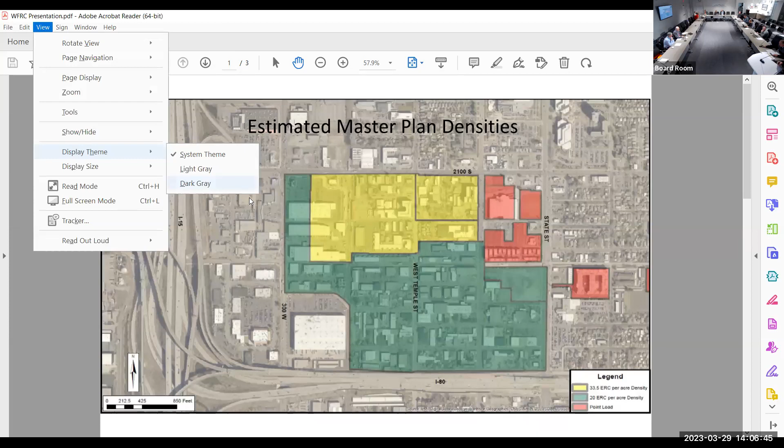Mike, is this on? Okay. Well, I'd like to say I was grateful for the opportunity, but you know, I'm here. Do make sure you get some of the refreshments. I called the mayor's office and said, what's a place that represents South Salt Lake that I should pick up some refreshments for this meeting? And she said, oh, you got to go to Delise Bakery. So that's her favorite spot. So anyway.

I've been with South Salt Lake for about 17 years, and I think the thing we've worked on the most in the last 10, 12, 13 years has been trying to create a downtown in South Salt Lake. When Mayor Wood was elected in 2010, one of the things she realized quickly was that South Salt Lake suffered from an identity crisis. People didn't know where it was, didn't know what it was. In fact, when I accepted the job at South Salt Lake, I told my mom, who grew up in Holladay, graduated from Olympus High School, that I was going to work for South Salt Lake. And she goes, oh, where's that? I was like, well, it's south of Salt Lake. She goes, oh, is it a new city? I said, no, it's incorporated in 1938, Mom. It's been around longer than you have.

So anyway, that was one of the things she tried to address. We came up with a new logo and tagline, the city on the move. And since then, we've been moving as quickly as we could. I just wanted to show you, this is kind of the area where our downtown will be. It's got 21st South on the north, I-80 on the south, State Street to I-15 east and west.

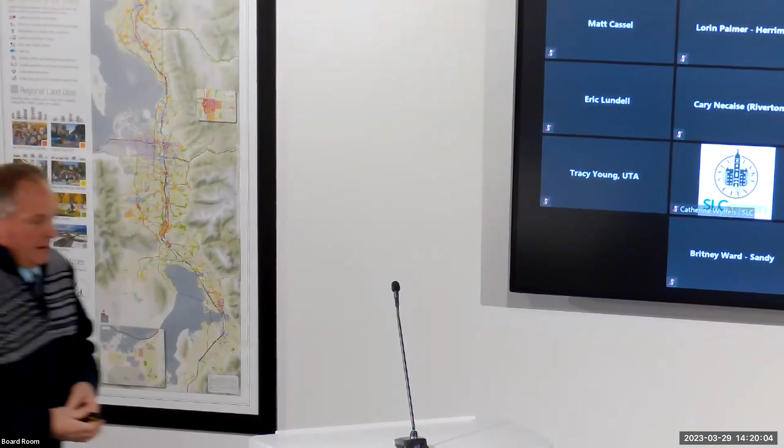Wonderful, thank you Madam Chair. So as Rosie's pulling up these slides, the intent of this meeting is we will have the opportunity to review the 4 programs that WFRC has responsibility and opportunity for as we coordinate and work with the local governments. But today, as we present this information to you, that's what we are doing - presenting it, and then this body will make those recommendations that we will take to TransCom. So reminding you of our process, many of you have seen this multiple times, but we're in the final stages of our project review and evaluation period.

And then after today's meeting, your recommendations, we will take to TransCom, which will meet at the end of April this year. Once TransCom reviews all the material and your recommendations, they will make recommendations to the Regional Council for the projects to be entered into the programs. Wasatch Front will then meet in May, and they will review that information and recommendations and make recommendations to put them into the draft TIP, which we will prepare with UDOT and UTA.

Take that information out to public review and comment during the month of July, and then be back to this body in August to report any comments or information that might have transpired or improved during the time. Then we go through approval during August through TransCom and Regional Council, and it goes to Federal Highways and Federal Transit during the month of September. And then come October 1, we have our new 2024-2029 Transportation Improvement Program. Prior to that approval, we'll be starting on the next one.

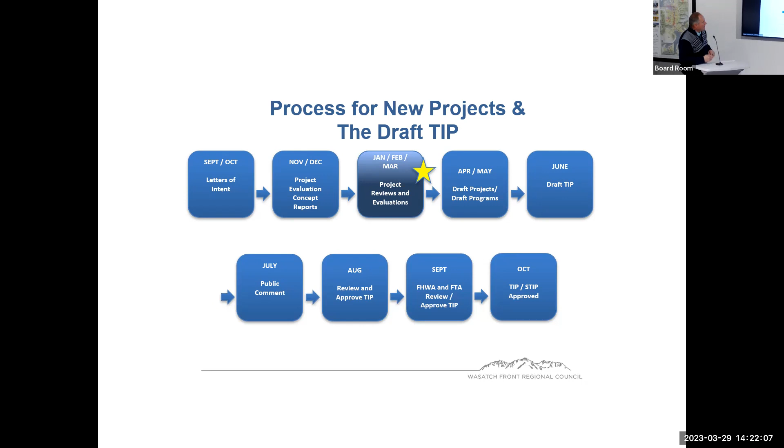As you're aware, in the Salt Lake area, this is where all the projects are. We had 71 projects that we had the opportunity to evaluate, review on site, and work with project sponsors. We had the STP, there was more than $147 million in request, and we have an available 27 million to program. In the CMAQ, there was almost 57 million in request, and we have 11 million to program. TAP was a little more than 21 million with 3.4 million available to program, and the carbon reduction program, brand new, this is our first year with it, we had 42+ million in request and 4.5 available to program. So that's what we're gonna go.

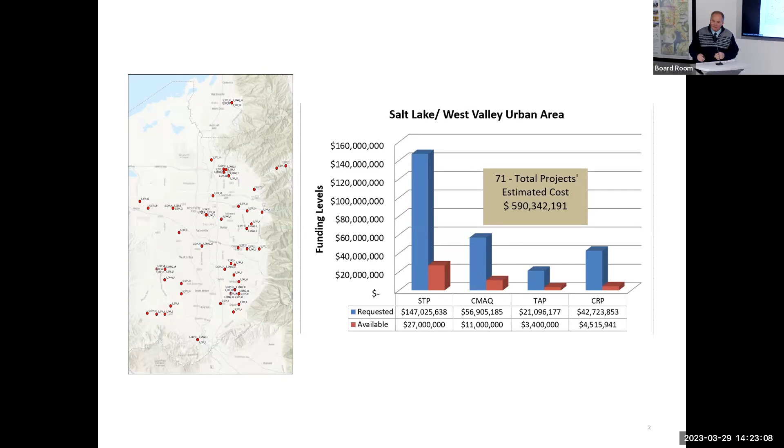The intent here is to fly through first the STP program. We'll walk through these 31 projects very quickly so that you're familiar again with the project, so it's more than just a name on the page. Then we will pass out these tables and have that discussion, starting with the staff recommendations. Then we'll turn it over to the chair to walk through any discussion on the projects and then for approval of the program. Then we'll come back and go through the CMAQ and the carbon reduction program slides, go through that discussion, and end up with the TAP. So any questions on where we're gonna go from here? We're gonna go kind of quick.

Fantastic, so here we are. I won't go through as much detail as we did in February, but we'll go through each slide. So on the 31 slides, the very first project that we'll review is the Cottonwood Heights.

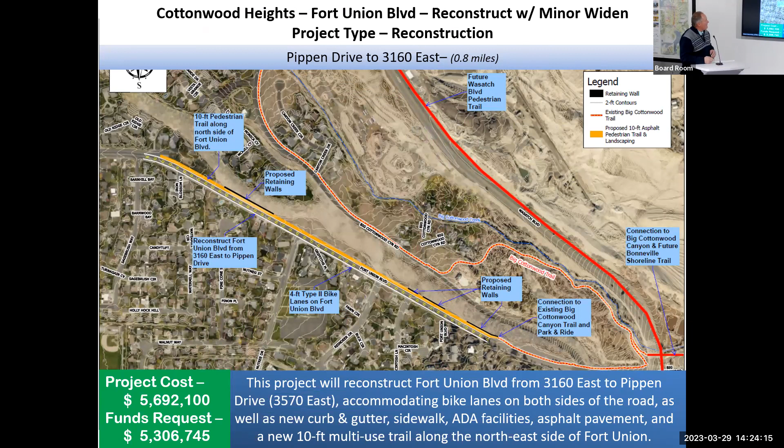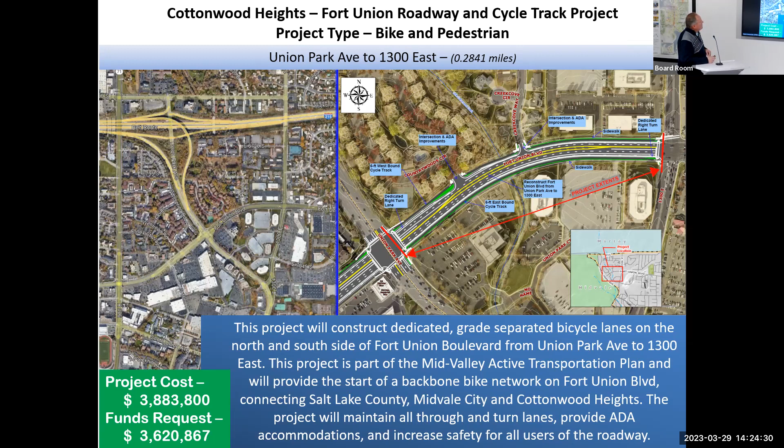It's Fort Union Boulevard, reconstruct with minor widening between Pippen Drive and 3160 East, just under a mile in length. The next project is another request from Cottonwood Heights, the Fort Union Roadway Cycle Track Project, down closer west between Union Park Avenue and 13th East, just over a quarter mile in length.

The next project is a request from UDOT. This is in the Draper area on 123rd South at Lone Peak Parkway. This is to address turning movements coming off I-15.

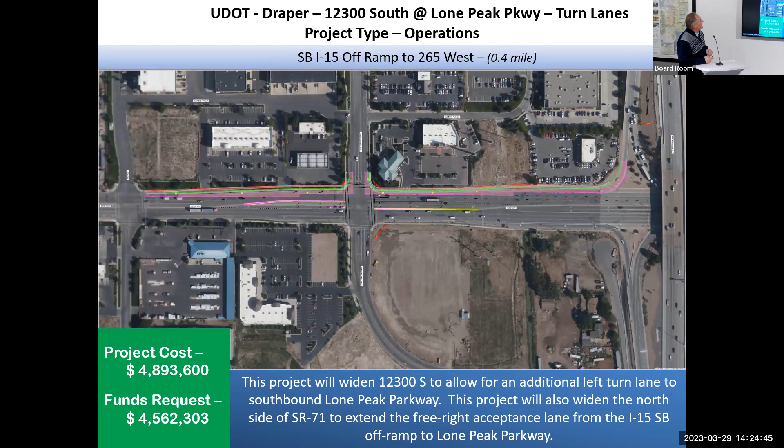The next project is a project request from Draper, on Fort Street. This is a reconstruct and minor widening to get a uniform cross section between 132nd South and 138th South, 8/10 of a mile in length.

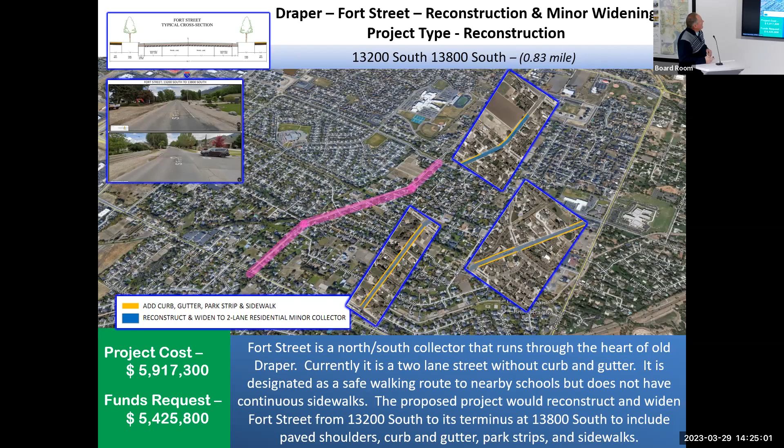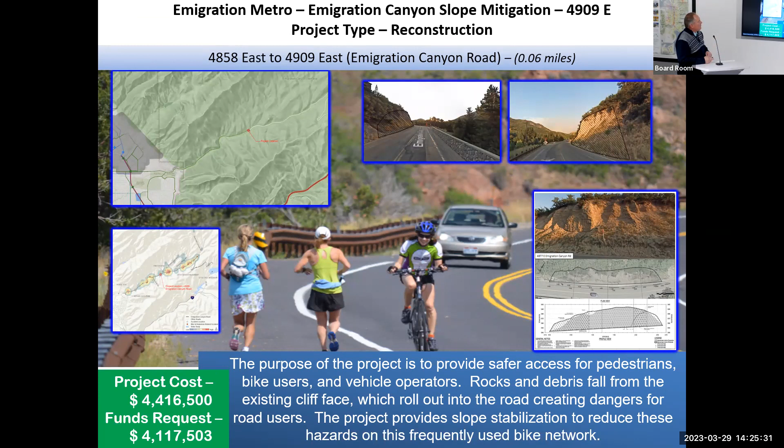Next project request is in Emigration Canyon, for canyon slope mitigation at about 4900 East. We've seen this project before - they have rock fall that drops down onto the road, making it hazardous for the motorist as well as the bicycle and pedestrian use up the canyon.

Next project, also in Emigration Canyon, is for safety improvements between 5655 and 9698, moving up the canyon, for various safety improvements: widening the road, moving back the barricades, and improving it to minimize bike and pedestrian interactions.

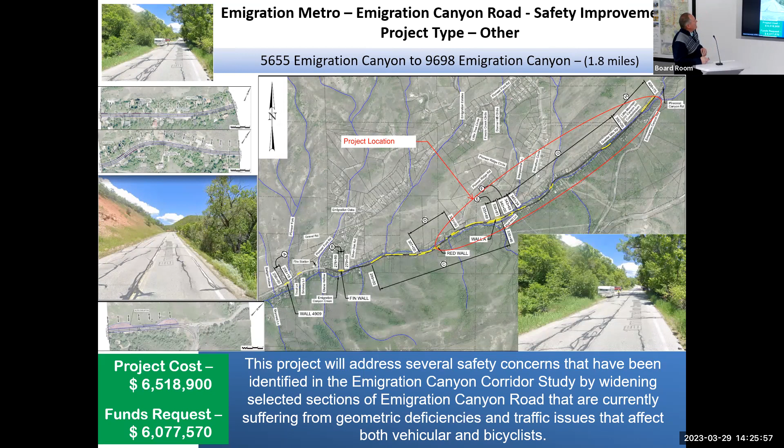Next project request is in Herriman City, on 12600 South, Herriman Main Street. This is for a center intersection improvement there at 12600 South and Main, giving you additional right turning movement.

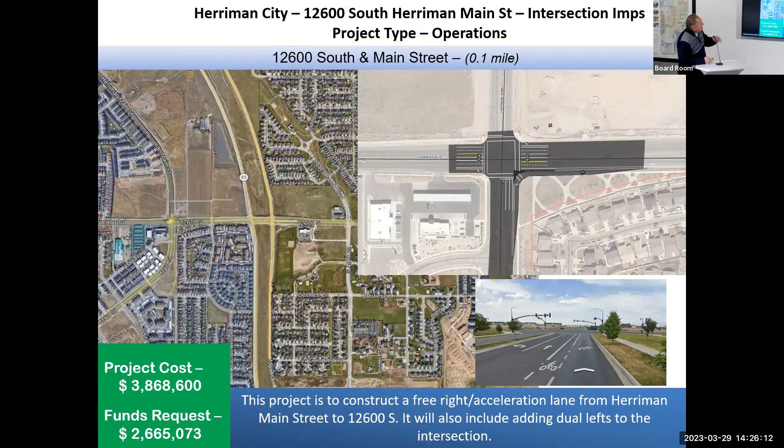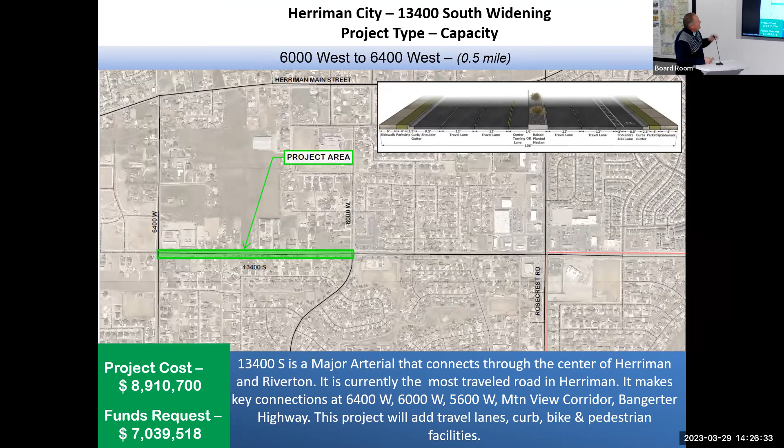The next project is in Herriman City, on 13400 South. This is to widen the facility from the existing 3-lane to a 5-lane cross section. Further east, it'll be a 7-lane cross section; further west, it'll be a 3-lane cross section. But this particular ask is between 6,000 West and 6,400 West.

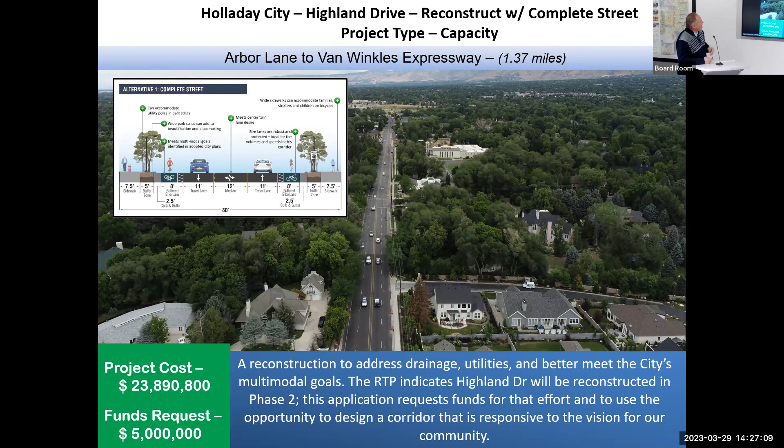The next project in Holladay is for a reconstruct and a complete street on Highland Drive between Arbor Lane and Van Winkle, a little less than 1.5 miles in length, to get a complete street use of the facility.

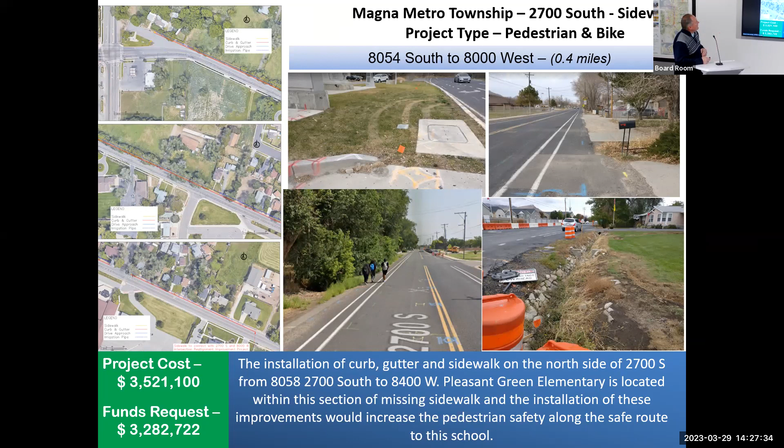Next project is in Magna, from the Metro Township, on 2700 South. This is a safe routes type of improvement on this facility. It'll widen the road, give you curb, gutter and sidewalk on the north side of the facility, and give a uniform cross section of the road between 8000 South and 8000 West.

Next project, Millcreek, this is on 13th East.

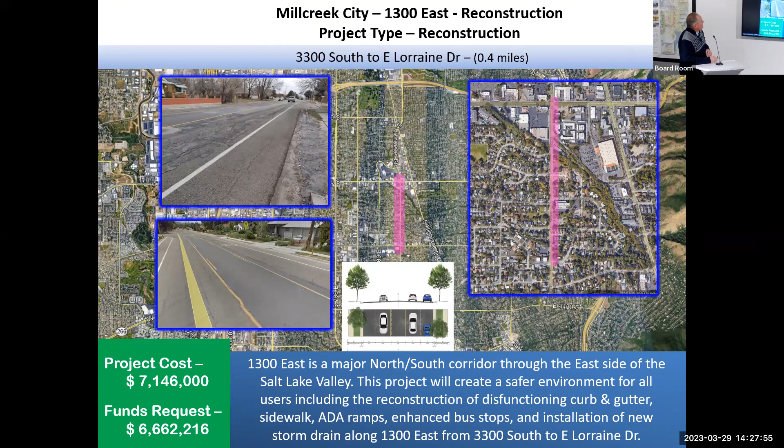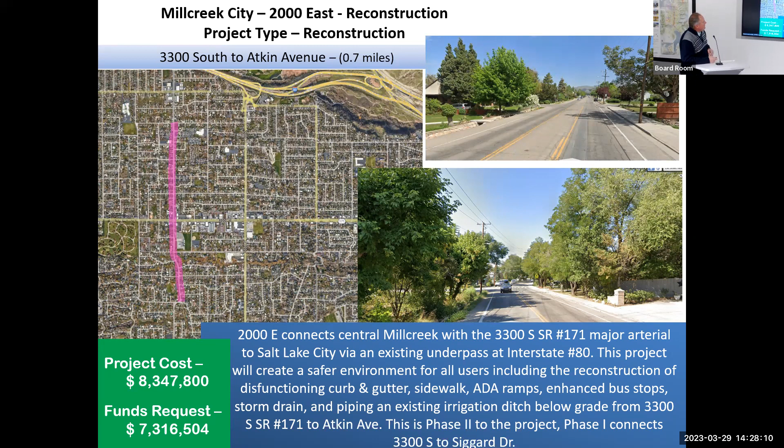This is a reconstruction of this particular facility between 33rd South and Lorraine Drive, just under a half mile in length. Next project also in Millcreek, on 20th East, a reconstruct with curb, gutter and sidewalk between 33rd South and Atkin Avenue, about 3/4 mile.

Next request is the UTA Mid-Valley Connector, for electric buses on the Mid-Valley line. That line runs from the Murray, Utah Murray Station over to West Valley, to the Central Station, about 7 miles in length of this BRT.

Next project is a request from Salt Lake City, 9th West reconstruction project between North Temple and 600 North, 3/4 mile in length. Next project is a request from UDOT Salt Lake City, on Foothill Boulevard or SR 186, for ped and bike improvements along this facility between 17th South and Laurelhurst Drive.

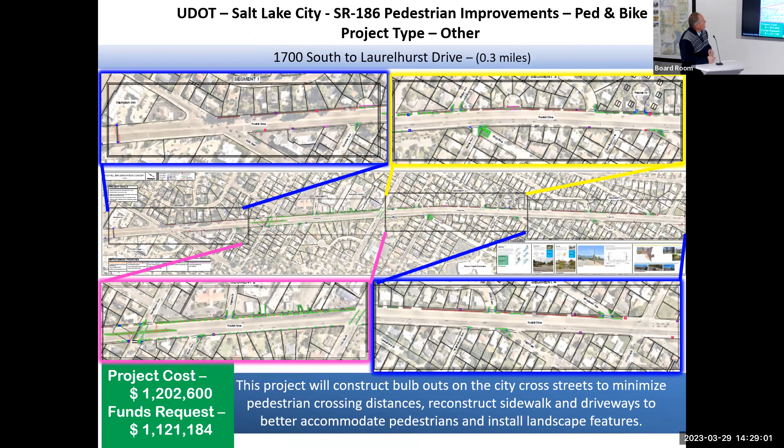Next request is from UTA, the Salt Lake On Route electric bus charging infrastructure. This request is for 2 electric chargers so the buses have more distribution on their use.

Next project is a request from Sandy City, on 110th South and 10th East, to construct a roundabout at an existing intersection.

Next project is also in Sandy, on 114th South and 13th East, for operational improvements to address turning movements. Next project is at Draper-Sandy City, on 114th South at 7th East, also to address turning movements, dual lefts both eastbound and northbound, and right turn improvements.

The next request is the Davis Salt Lake Connector, for construction of this facility between Davis County and Salt Lake City.

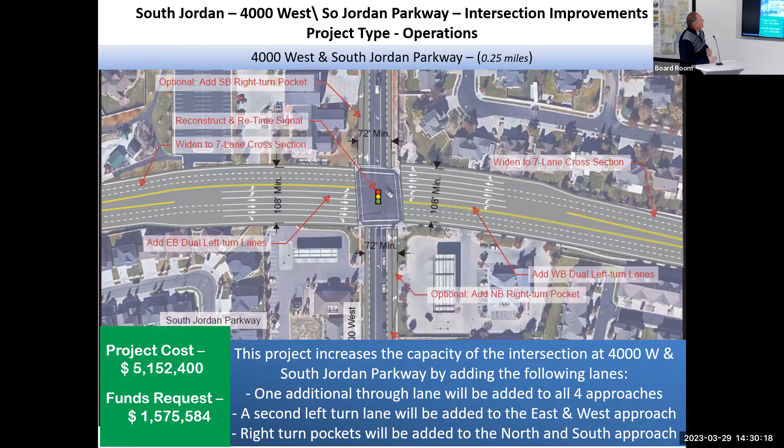Next project in South Jordan is on 4000 West at South Jordan Parkway, for intersection improvements to put an additional through movement on all four legs. Next project is also a South Jordan request at 4000 West, to create a through U-turn intersection improvement.

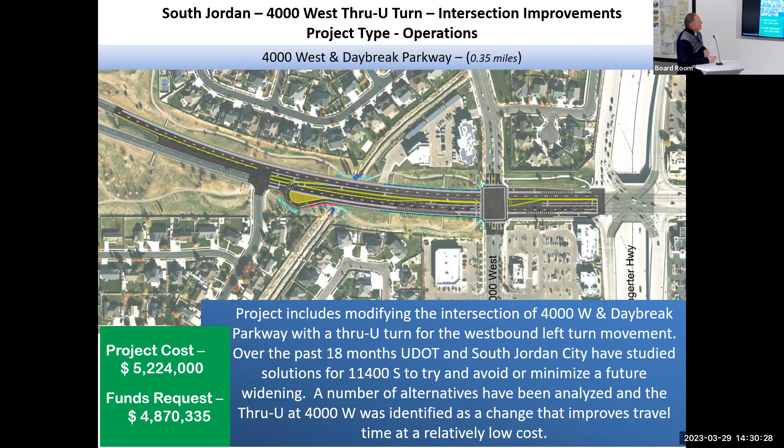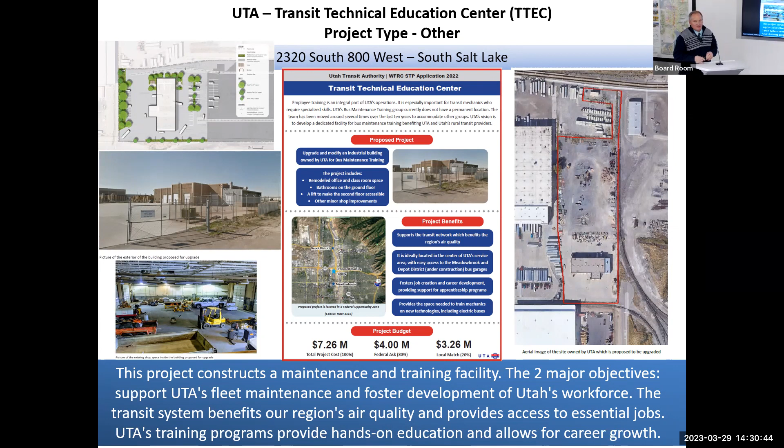The next project is UTA, for the Transit Technical Education Center. This is to take an existing facility and make it into an educational system for mechanics, drivers, and other UTA personnel. Then we have a request from West Jordan on 90th South, for new construction at the intersection of 64 West and New Bingham Highway.

We have a request from Redwood, or West Jordan, on Redwood Road at 6720 South. This is also an intersection improvement, to install a signal at this intersection.

The next one is a request from UTA, for the West Side Express bus service. This will go from the intermodal center at Salt Lake all the way to the old Bingham Highway Station, 29 miles.

Sorry about that. Let's see, did we do this? I hit a...

Then we have a request from West Valley City on 13th West. This is to improve this facility to enhance the bike lanes, as well as to control the width of the facility between 40th South and 33rd South.

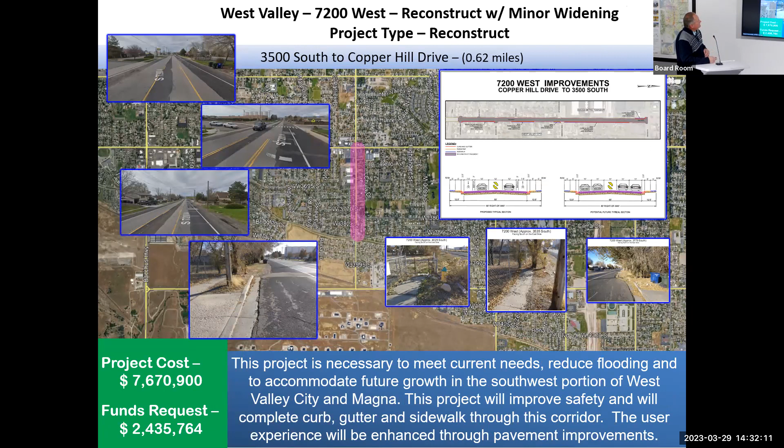Next project from West Valley is on 7200 West. This is reconstruct with minor widening, improvements to curb, gutters, shoulders, and sidewalks between 3500 South and Copper Hill Drive.

Then we have a request from West Valley City and Taylorsville City on 3900 South. This is mainly for bike and ped improvements, but will also address reconstruction of the existing facility.

And this particular project from Salt Lake City, the East Downtown Mobility Hub with electric bus charging stations, has been withdrawn from the program. That's all of the STP projects.

Was that quick enough? Want to see them in reverse? We can accommodate. So, thanks.

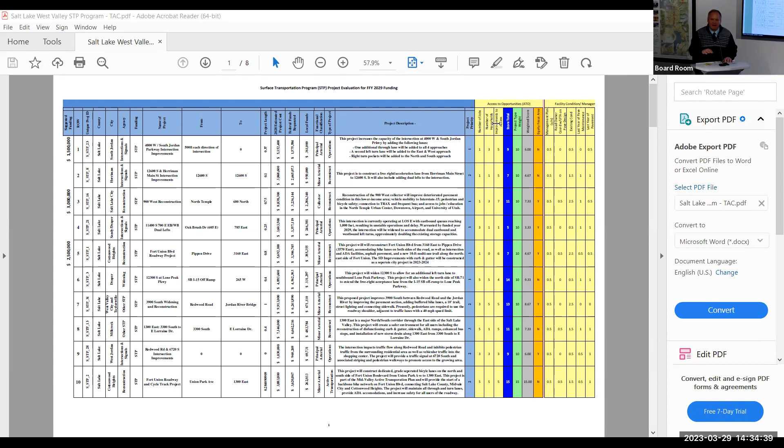One thing we've done differently this year than in the past is we put the amount of staff recommendation right on the sheet as we initiate our discussion and conversation with you. We'll walk through each of those, but as you look at the project and the points, this is one tool to identify and select the best project for the funds we have available.

There are other things we utilize to help identify the best project. Not only do we use the data, but this information is extracted from the concept reports that we receive from you.

We take that data, enter it all into a database, compile and calculate and determine what this information is and we put a point to it. But other things we're looking at and considering are items identified out on the field review. When we're out there with folks from our office, all of you were invited to participate via Zoom. We had participation this year also from the county, UDOT, UTA, and staff. We go out on the project site, identify projects, highlight their benefits, and underline some concerns. We also have other relevant professional considerations that help us identify a project that you can't really put a score to.

So those are items we utilize to identify a good project. As we're going through, we don't just take the top 10 projects identified by points, but we'll go through each project and have the reasoning behind why that project is being recommended from the staff. So if there are no questions, we can start. And everyone online has got a copy.

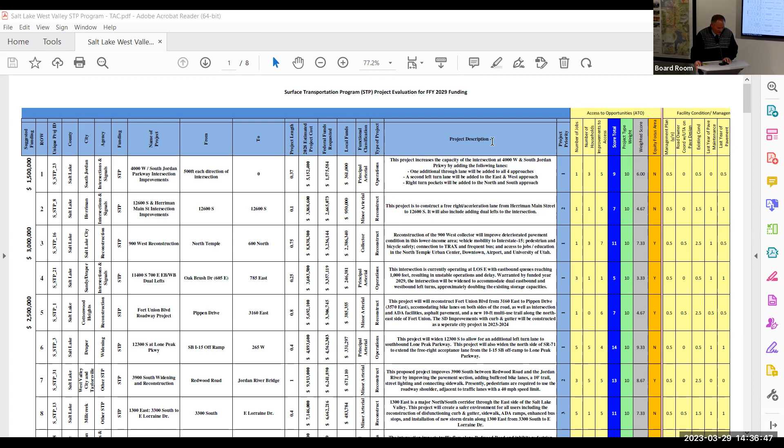Thank you, Ben. So the very first project on the sheet, row number 1, you have $1.5 million there in the far left corner. This is a project in South Jordan, on the intersection of 4000 West and South Jordan Parkway. Their initial request was for 1.57 million and staff's recommending 1.5 million. This is one of the projects that was partially funded last year.

Then going down, we skip the next project in Herriman on 12600 South - we'll address a higher priority one. As you can see, let me walk through the top of the sheet. In the column, you'll see a blue column about two-thirds of the way across on the right-hand side - that column has the priority, the city's priority on the projects. As you know, when you prepare the concept reports, we ask how many are being submitted by the city and what's the priority. It helps us - it doesn't guarantee that's always going to be our first recommendation, but it gives us an idea of what's important or where the city's focusing.

So row number 3 is a project on 900 West. This is a Salt Lake City project. Their request was for $3.2 million, staff's recommending $3 million. This was also a request from last year.

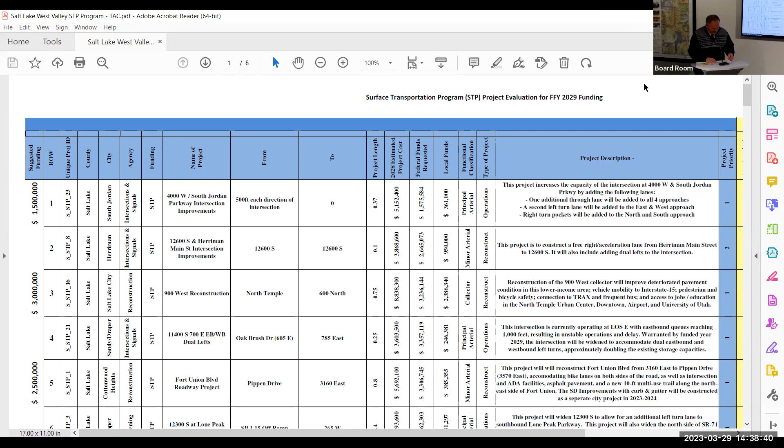Then we skip row number 4 and move on to row number 5. This is a request from Cottonwood Heights on Fort Union Boulevard between Pippen Drive and 3160 East. The request was for 3.3+ million and staff is recommending 2.5 million. We skip rows 6, 7, 8, 9, and 10, which moves us on to the next page.

The first project on the next page is project number 11. This is a project in West Valley Magna, on 7200 West - a reconstruction project. Their request was for $2.4+ million and staff's recommending $2.4 million. This was another project that was recommended last year.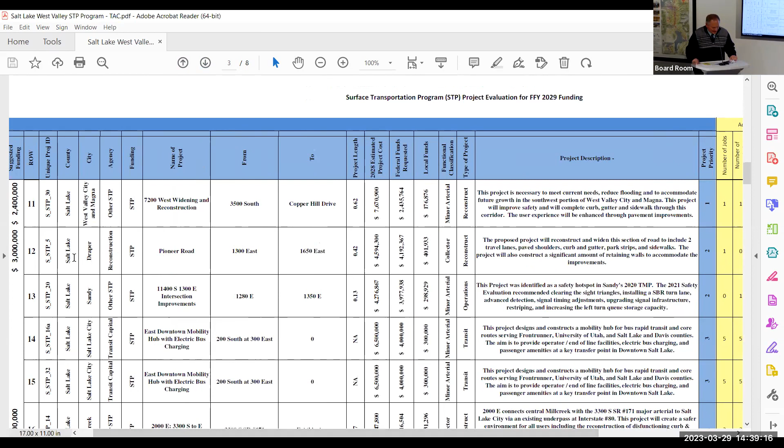The next project, row number 12, is a project in Draper on Pioneer Road, from 13th East to 1650 East. The request was for $4.1+ million and staff is recommending $3 million for this project.

We then skip rows 13, 14, and 15, which brings us to row number 16. This is a Millcreek project on 20th East between 33rd South and East Atkin Avenue. They were requesting 7.3+ million and staff's recommending $3 million.

The next project is a request from West Jordan City, on the intersection at 90th South between 6400 West and New Bingham Highway. The request was just under $5 million and staff's recommending $2.5 million.

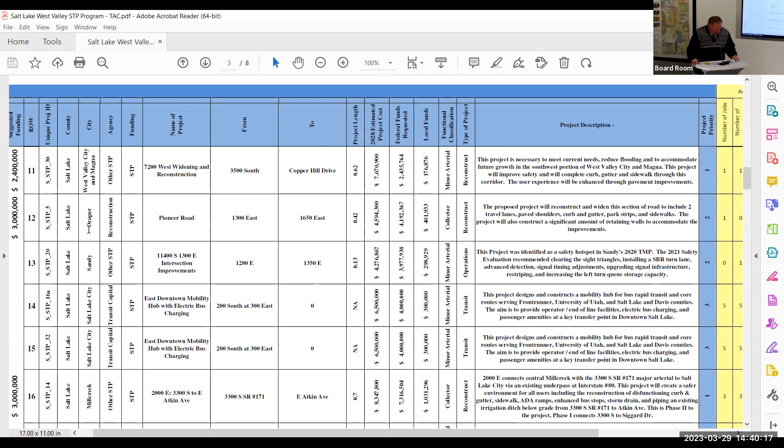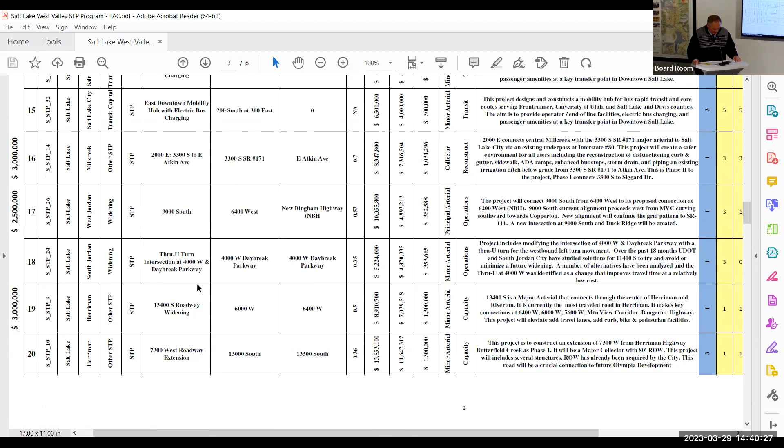Then we skip row number 18 and go to row number 19, which brings us to Herriman's 13400 South. This is for roadway widening between 6,000 and 6,400 West. The request was for a little more than 7 million and staff is recommending $3 million. We skip row 20, which brings us to the third page.

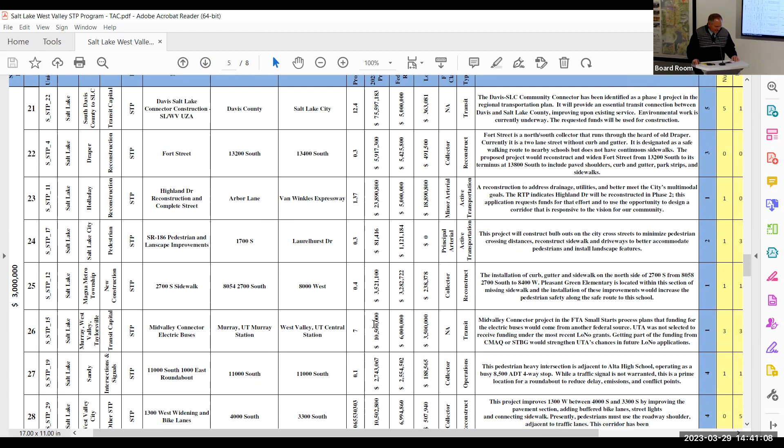We go down to row number 25. This is a request from Magna Metro Township for the sidewalk on 2700 South between 8054 and 8000 West. The request was for 3.2 plus million.

Staff is recommending 3 million. We then skip down to project number 30, an Emigration Canyon roadway safety project between 5655 East and 9698 East. The request was for a little more than 6 million, and staff is recommending 3 million.

I believe that is the last project being recommended by staff. That gives us the total at the bottom of the fourth page - a total programmed amount of 26.9 million. The available was 27 million, and the requested was 148 million.

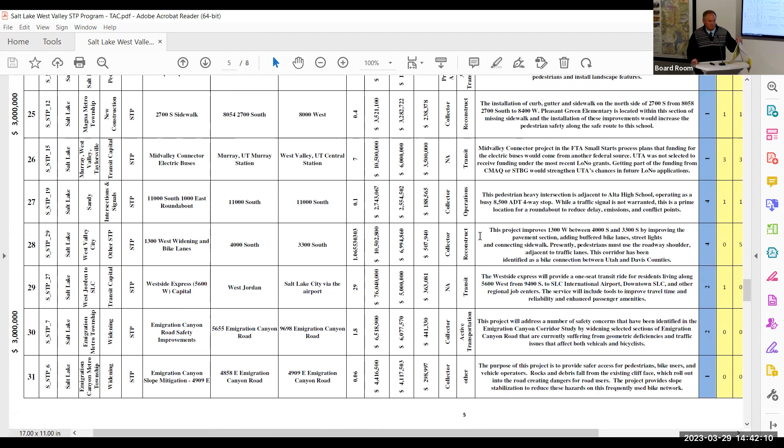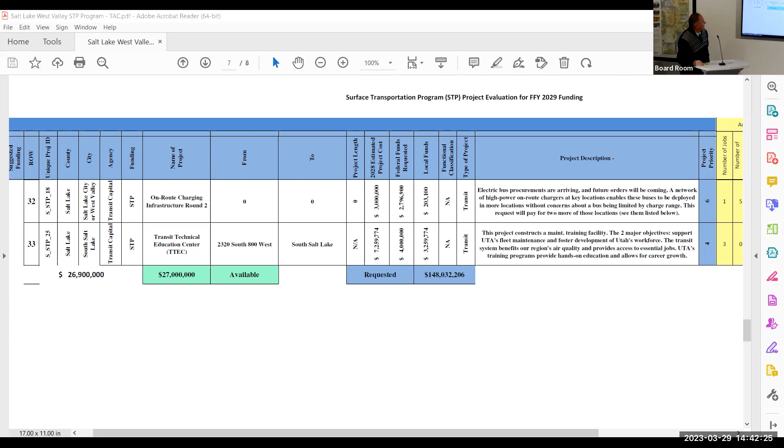Any questions on any of these projects or any of the staff recommendations? Okay, Madam Chair, for discussion and approval. No questions. Is there anyone that needs to bring up any discussion items on the recommended project selections for funding? Okay, I am not seeing anyone.

At this point, we'll make a motion to recommend these selected projects and funding amounts to the Transportation Commission. Is there anyone in this group who would be willing to make that motion?

Before a motion, might I ask if others in the group - I personally here in the Salt Lake area would like to see the CMAQ projects and recommendations before we make an STP recommendation. I know a lot of entities applied for both CMAQ and STP. At least I know UTA did. It seemed like there were a lot of other intersection projects that were on both as well.

Do we want to see what the rest of the TAC thinks, if they want to see that first or not? Okay, sure. Is that something that we can do, Ben?

The CMAQ and the CRP program are pretty closely tied, so it's almost that we'll need to go through all of the full programs before we take any action. That's totally up to this committee.

Or maybe just skip the STP recommendations to last and do the CMAQ, CRP, TAP, and then see what's left, because there's a number of projects either in the CMAQ and the STP, or the STP and the TAP, but if they're recommended in that, then they'll fall out of the STP, and maybe it's a different discussion.

All right, so this is the CMAQ program. There were 15 projects submitted in the CMAQ. Of the 15 projects, they totaled a little under 60 million. We had 11 million to program. A couple of those projects withdrew, but we'll go through that. There's all the projects that you had information for.

The first one, request is in Herriman. This is a park and ride facility out on Porter Rockwell Boulevard and Rockwell Park Drive, right off of east of Redwood Road. The next project is a project in Holladay - this is the complete streets improvement.

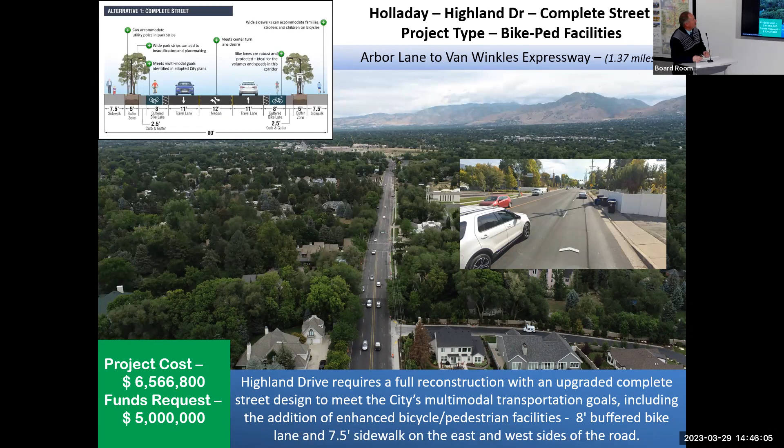This is for the bike ped facilities portion of that project between Arbor Lane and Van Winkles Expressway. Next project is the signal optimization project in Holladay, for multiple intersections through Holladay City.

Next project is the electric buses for the Mid-Valley Connector with UTA. The next project is the East Downtown Mobility Hub with electric bus charging. This is one project that's been withdrawn for this year's evaluations.

Next project is Salt Lake City's expansion of the bike share program. Next project is the intersection improvements in Salt Lake on 500 East and 700 South. This is to convert an existing intersection to a roundabout.

Next project is the en-route electric bus charging infrastructure for UTA - this is for 2 chargers. The next one is the West Side Express operating costs. The request is for 3 years of operations, 3 million dollars a year.

The next one has no comments there - who was that? Unless that was you, Merritt, then that's totally fine. But the next project is in Sandy, on 11000 South and 1000 East. This is to construct a roundabout at an existing intersection there by Alta High.

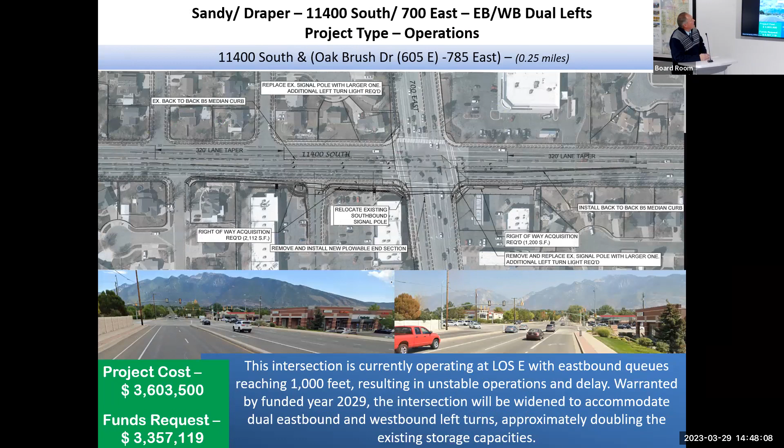The next project is in Sandy, on 114th South and 13th East, intersection improvements. Next project is Sandy City's on 90th South, or SR 209, for a pedestrian bridge over 90th South. The next project is a joint request from Sandy and Draper on 114th South and 7th East for intersection improvements.

Next one is the Davis Salt Lake Connector, for construction of that bus facility. Next project is UTA West Side Express, for the construction.

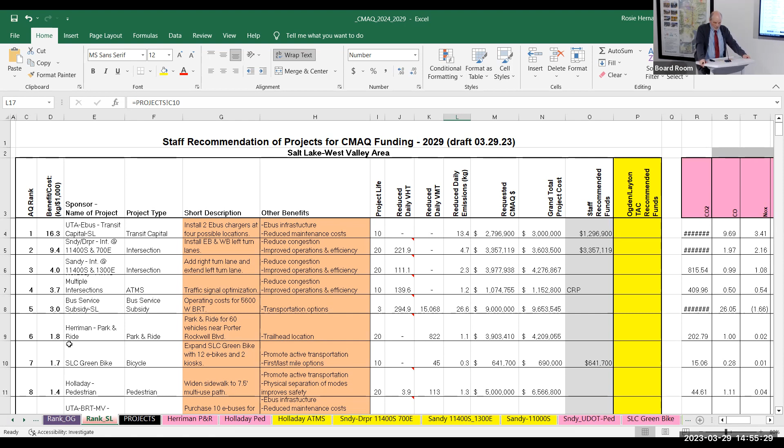The Holladay pedestrian project, they had multiple proposals as well, and we were recommending their signal timing project in the CRP program.

Where am I? The UTA Mid-Valley BRT. This is for purchasing 10 e-buses. We recommended partial funding there. I think that's enough for 2 e-buses.

And then the last one we were able to get to was the Sandy pedestrian project, a bridge spanning SR 209. That's 90th South, right? So that brings the total of those CMAQ recommendations to just over 11 million.

Ben says he's good for the other 17,000. He sold a few llamas this year, so he's in good shape.

One other note: in those two columns in the center, highlighted in beige, we identify some other ancillary benefits to these projects. It's not totally emission reductions we're looking at. We do consider that there's safety benefits or other considerations that play into those recommendations. So any questions about what was presented here?

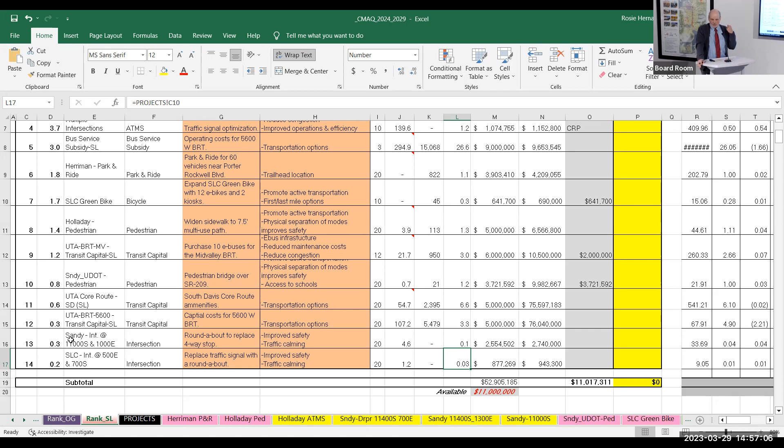Okay, then I think we were going to look at, Ben's going to show slides of the carbon reduction program proposals, and then they'll come back with the recommendation on carbon reduction, which you have before you already. So my further comments will be brief, I think.

Do I? I would, it would detract from the meeting, I'm sure. No good at those either. But anyone else is welcome to add if you have one. Ah, saved by the bell. Here we go. All right.

So we're going to review the carbon reduction program. There were 15 projects submitted for evaluation, totaling almost $43 million. Pretty good for the first time we've had this chance with this particular funding source. 4.5 million available. So on those projects, the first project would be a request from Cottonwood Heights.

It's a Highland Drive protected trail bike-ped facility. This is on the east side of the road between Fort Union Boulevard and Vine Avenue. I know I said that wrong.

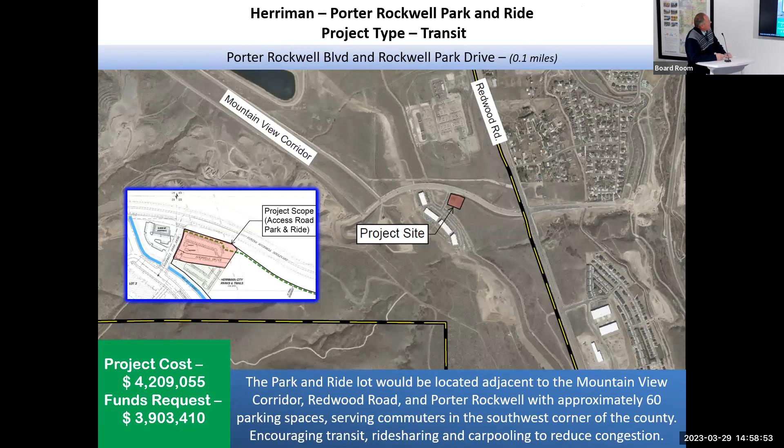Sorry, Matt. The next project in Herriman is the Park and Ride facility just west of Redwood Road, on Porter Rockwell Boulevard and Rockwell Park Drive. Next project is the signal optimization project in Holladay at multiple intersections through the city.

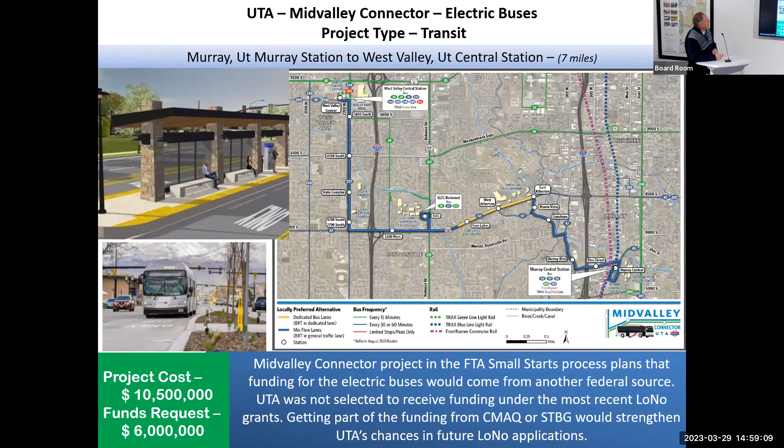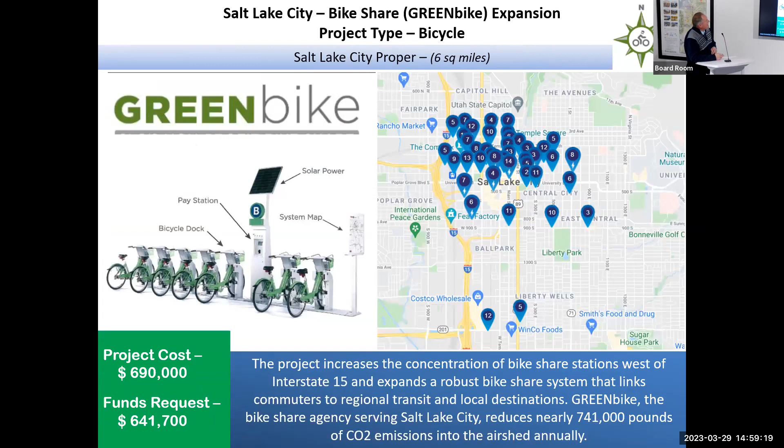Next project is the Mid-Valley Connector electric buses. Then we have this project that was withdrawn, the East Downtown Mobility Hub. We have the request from Salt Lake City on the GREENbike expansion.

We have the request for an electric vehicle car sharing program in Salt Lake City. This would be for two locations. We have a request for an intersection improvement at 500 East and 700 South in Salt Lake City, converting a regular intersection into a roundabout.

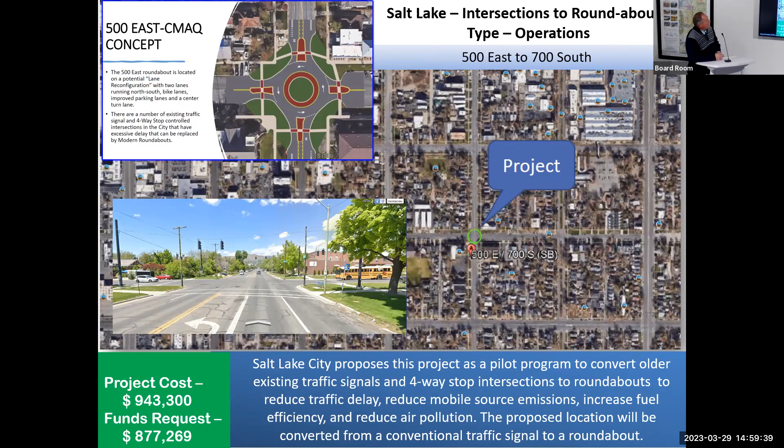We have the en-route electric bus charging infrastructure for UTA, for two chargers. We have an intersection project at Sandy City, just outside of Alta High School, to convert the intersection into a roundabout.

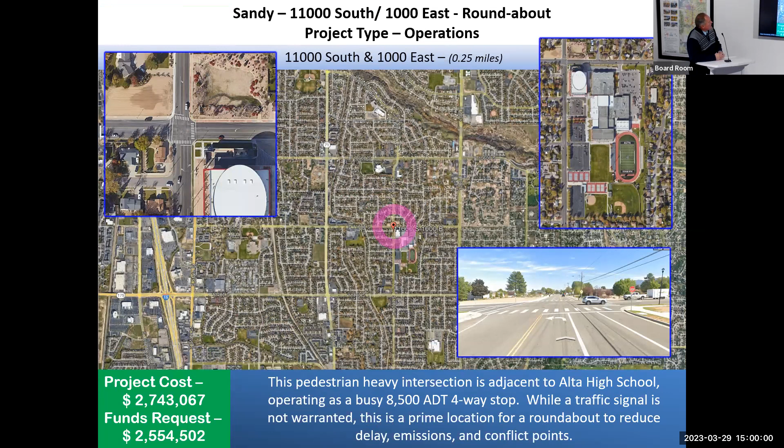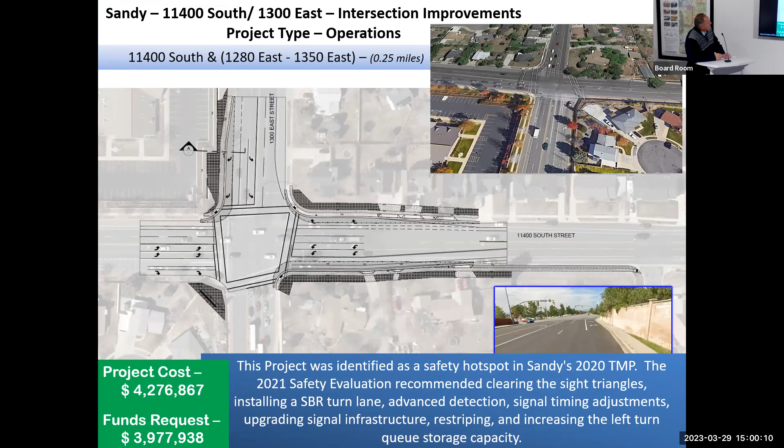We have a request from Sandy City on the intersection at 11400 South and 1300 East to address the turning movements. We have a request from Sandy City for a bike-ped overpass or bridge over SR 209.

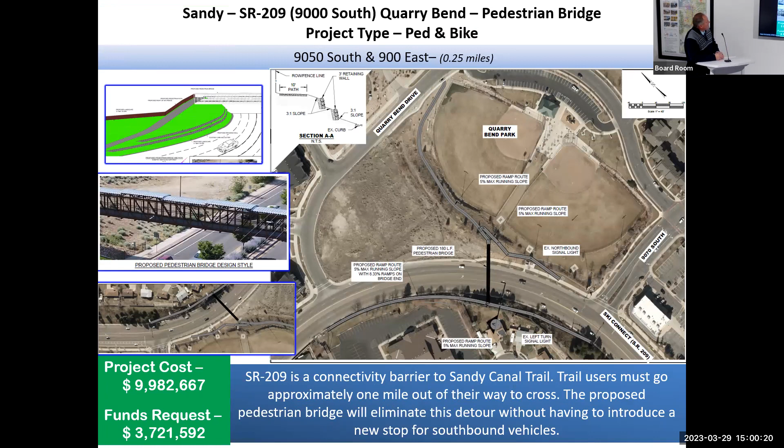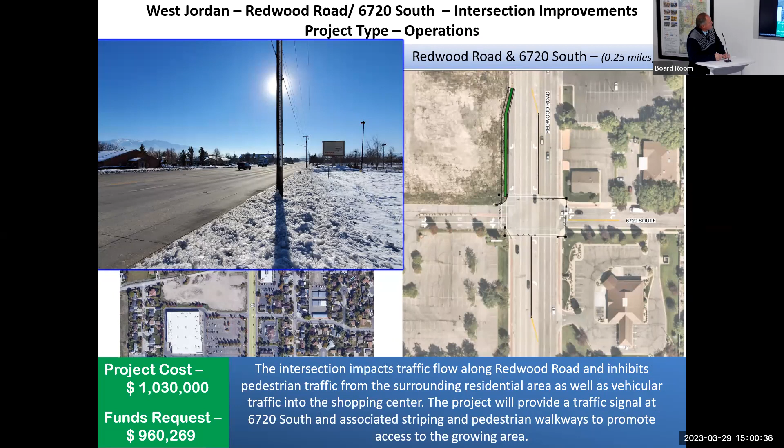We have the Davis-Salt Lake Connector construction project. We have a request for an intersection improvement in West Jordan at Redwood Road and 6720 South, to put in a signal. We have a request for the construction on the West Side Express.

And that's all of the CRP. Kip.

Thanks, Ben. One point I wanted to make about the CMAQ program discussed earlier: we had a lot more money this cycle than we normally do, because with this new carbon reduction program, Ben worked with Federal Highways to take some of the programs already in the queue for CMAQ and move them into the carbon reduction program so they could get funded immediately. That brought some of CMAQ money back to the table—funds we otherwise would have missed out on. So that's why we had a little more this time.

So for the carbon reduction program, as Ben noted, there was about 4.5 million available. And you can see in that column, second from the right, we've recommended a little over 4.5 million in projects.

All right, wonderful. So in the TAP program, there were 10 projects that were submitted. Those 10 projects requested a little more than $21 million, and we have 3.4 million to program.

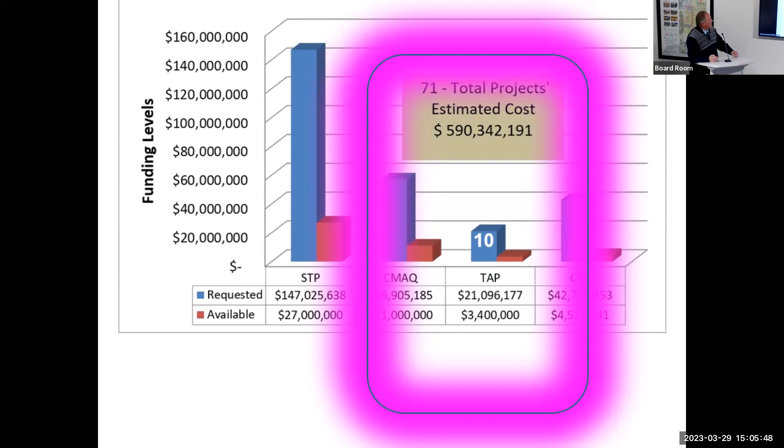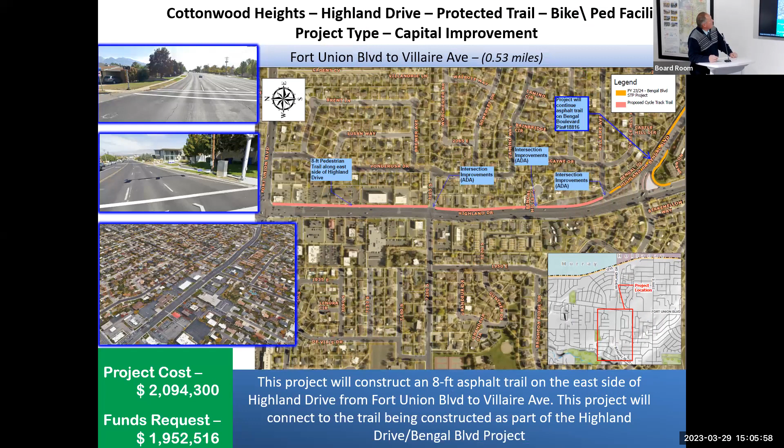Of those projects, the first one that we'll look at is the project in Cottonwood Heights on Highland Drive, a protected trail bike ped facility on the east side of Highland Drive between Fort Union Boulevard and Villaire Avenue.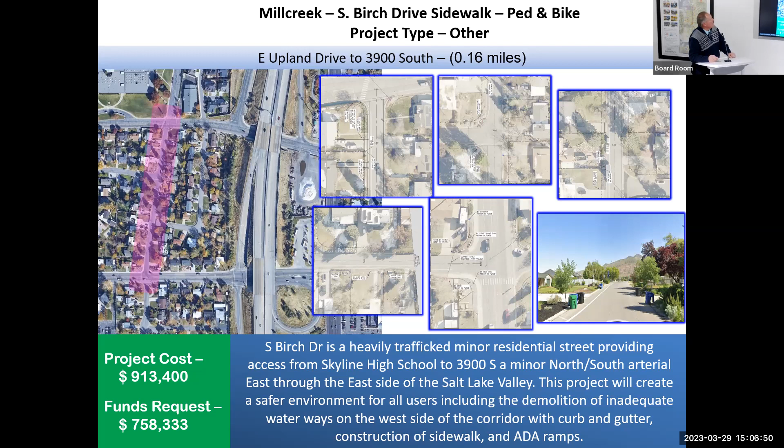Next project is in Millcreek. This is on South Birch Drive, a sidewalk ped bike facility to construct sidewalk on the west side of the road and on-street parking on the east side of the road between Upland Drive and 39 South.

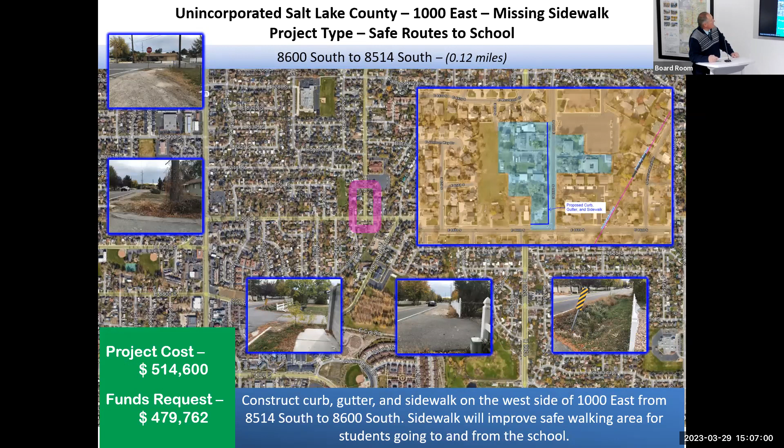Next project is in unincorporated Salt Lake County on 10th East. This is to construct missing sidewalk between 86 South and 8514 South.

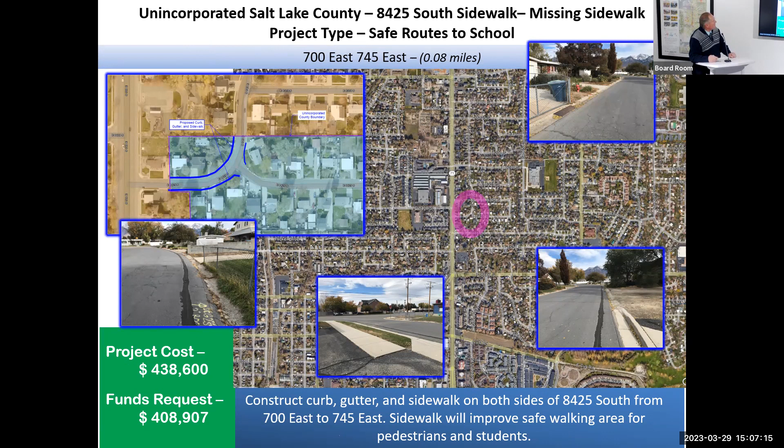Next project is also in unincorporated Salt Lake County on 8425 South sidewalk. This is Safe Routes to School to construct missing sidewalk between 7th East and 745 East.

Next project is a request from West Valley City on 13th West, a bike lane project. This is to give a uniform cross-section of the road and the installation of continued bike route improvements between 4,000 South and 3,300 South.

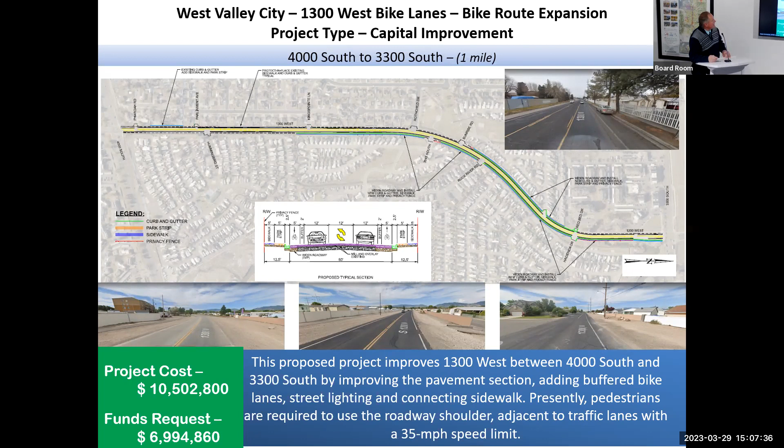Next project also in West Valley City is on 39th South. This is bike lanes, a West Valley Taylorsville joint ask on bike ped improvements between Redwood Road and the Jordan River.

Next request is in White City. This is for a route around the Bear Park multi-use path, a path around the park. It's a Safe Routes to School project between 9520 South and 9720 South.

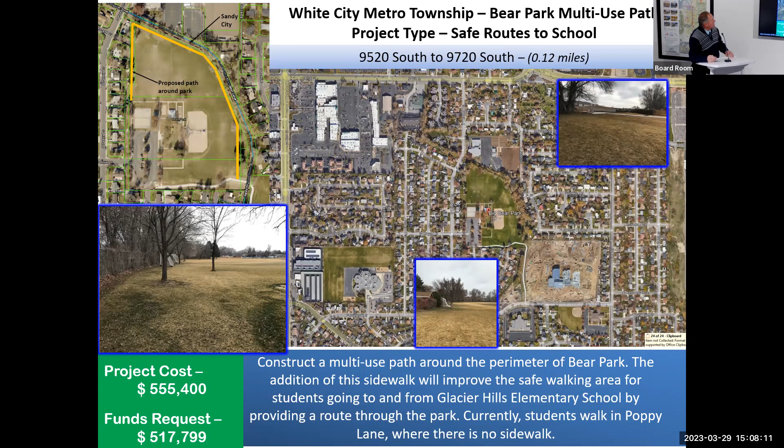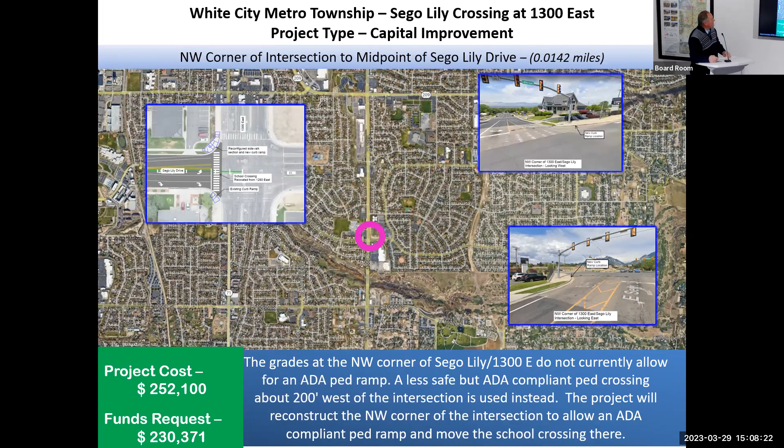Next project is also in White City, on Sego Lily Crossing at 1300 East. This addresses the crossing on the west leg of this intersection. And that's all of the projects for the TAP. We'll turn it to Hugh.

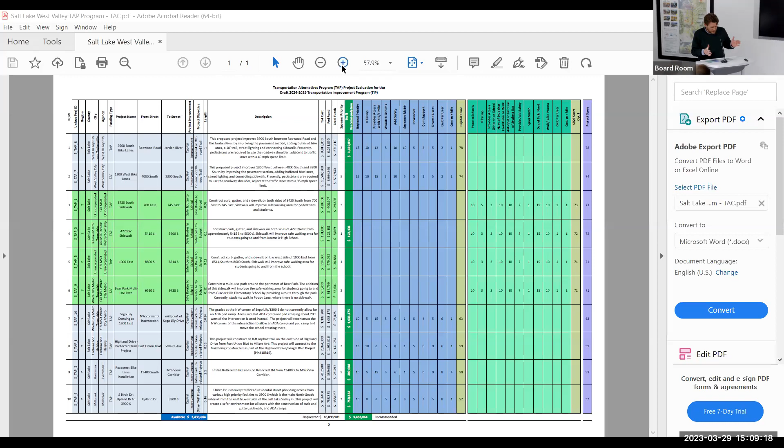Thanks for going through those projects, Ben. Looks like everybody now has a copy of this sheet. Similar to the STP, you'll see staff recommended funds on the far left part of the column. Before we get into the projects, I want to point out we have two different scoring columns. The blue numbers reflect scoring as a capital construction project, while the green numbers reflect scoring as a Safe Routes to School project. So that's the difference between the projects highlighted in green versus blue, they score slightly differently depending on the application.

To jump into it, we'll start with project number 1, 3900 South bike lanes and 10-foot trail. This project requested 6.2 million. It's a full roadway reconstruction joint project from West Valley and Taylorsville. Due to the limited number of funds in the TAP program, staff is recommending just over $1.1 million to that project.

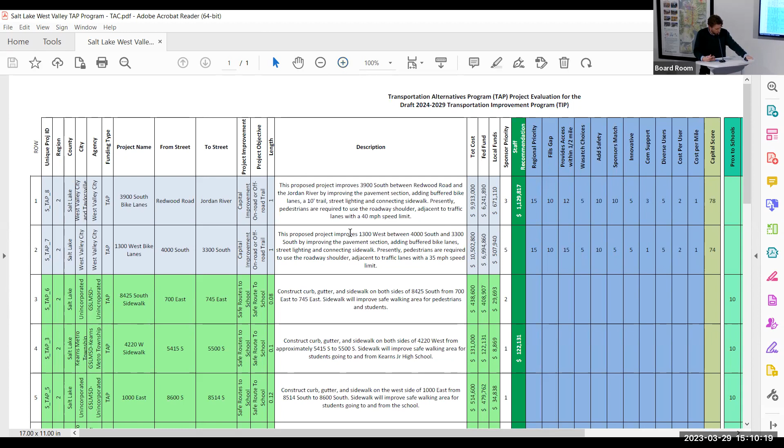Going to jump over projects 2 and 3 to get to number 4, which is the Kearns 4220 West Sidewalk Safe Routes to School project. The request was 122,000 plus, and staff is recommending that full amount.

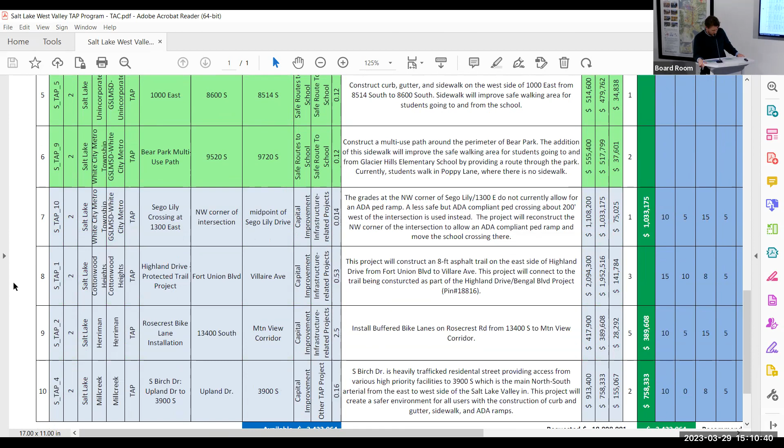Moving on, we will jump over projects 5 and 6 and get to number 7. This is a Sego Lily crossing at 13th East in White City, a safety project going to a middle school, improving the intersection for ADA compliance and school crossings. Request was just over $1 million, and staff is recommending that full request.

Jumping over the Highland Drive project that Kip was mentioning earlier in his programs, in the CMAQ and CRP programs, to project number 9, Herriman Rosecrest bike lane installation, about 2.5 miles of buffered bike lane. Request was for 389,000 plus, and staff is recommending the full amount there.

Last project on the list is in Millcreek, Birch Drive, Upland to 39th South connection, with improvements including sidewalk, curb and gutter, and ADA ramps. Request was 758 plus, and staff is recommending the full amount on that project. That is the entirety of the TAP program.

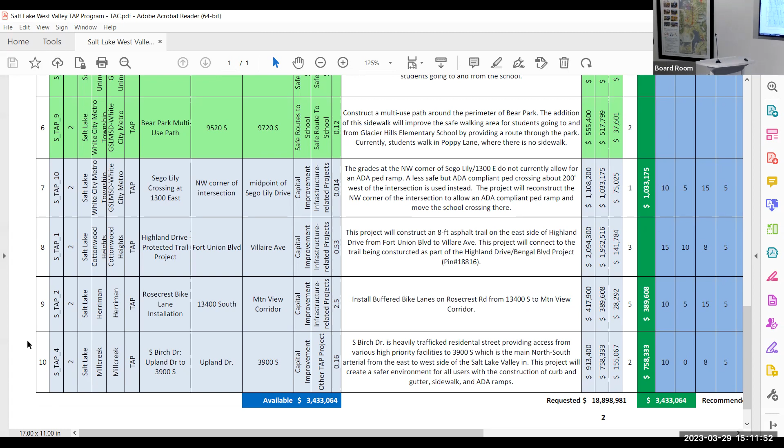Thank you, Madam Chair. Okay, thank you, Hugh. Does anyone have questions on the TAP program? Any discussion needed on those items?

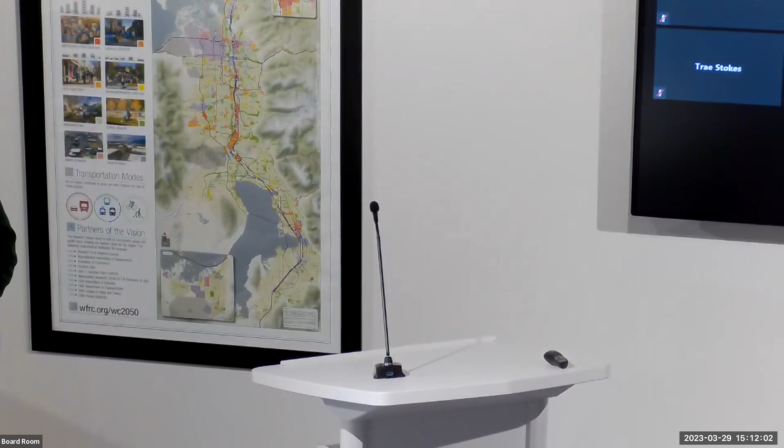I had one for item number 7, Sego Lily and 13th East. Based on our field visit, I know Salt Lake County was going to do a little bit more evaluation on that project cost. Was that already done, or is that still in the works?

Yeah, great question. Thank you for following up on that. The cost you see here reflects the additional work done to refine that cost. The original cost was maybe 350,000 with a 200 and some odd thousand dollar ask, so you can see it jumped up significantly. You are there, you know how challenging that intersection is, which is reflected in the cost now.

Perfect, thank you. Any other discussion items? Any other discussion on the project recommendations for all TIP program items before we move forward to making a motion? Okay, seeing none.

Ben, do we want to recommend CMAQ and CRP together at the same time, or do we separate those out? They'll need separate motions, but you can consider or discuss between them if you want, but separate motions would be preferred.

All right, let's start with CMAQ projects. Is there anyone willing to make a motion to recommend approval for the funded CMAQ projects to the Transportation Commission? This is Shane Ellis, I make a motion to recommend approval for these. Thank you, Shane. Is there a second? I'll second. Thank you, Dennis. This committee will recommend to the Transportation Commission that they fund the listed CMAQ projects as selected by this committee.